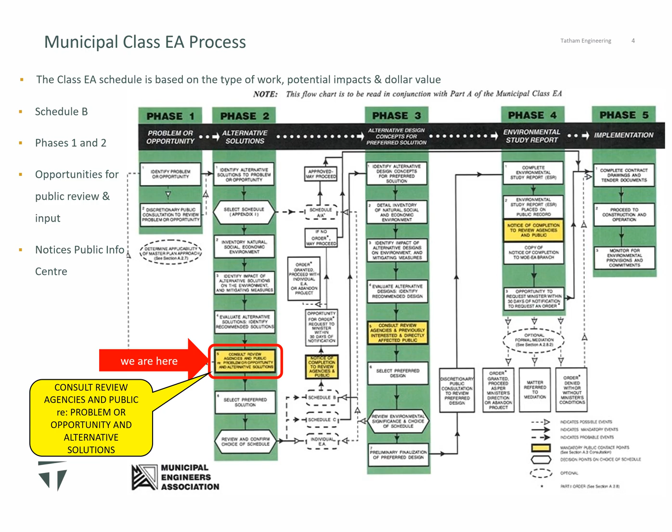Currently, the parking lot has 14 private deeded parking spaces that have been facilitated through historical development agreements for the water access properties on 1 Mile Island.

Beyond those 14 deeded spaces, there is limited parking for the general public and boat trailers. The existing docks will remain and are not part of this study.

The future needs for the parking lot area are to clearly identify the deeded parking spaces, provide additional parking for the general public, space for the trailers to park as to not impact vehicle movements, improve lighting, and implement stormwater drainage measures.

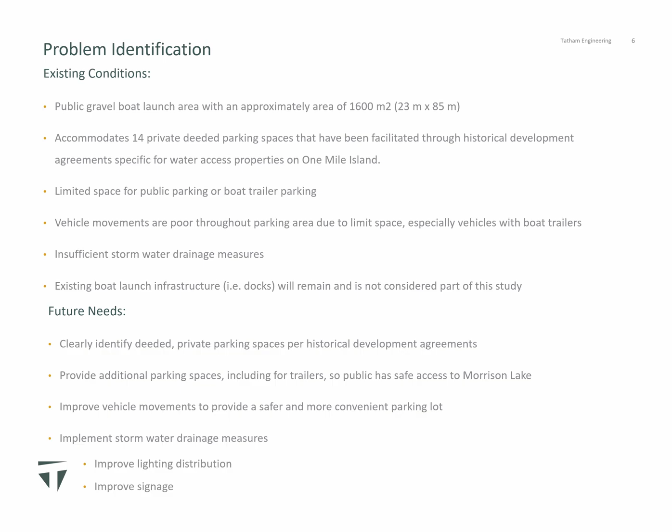A problem statement was developed to guide the municipal Class EA. The town's official plan acknowledges the importance of public water access and the enhancement and protection of these locations wherever possible. The problem statement speaks to accommodating all users and considers the environmental impacts of any expansion.

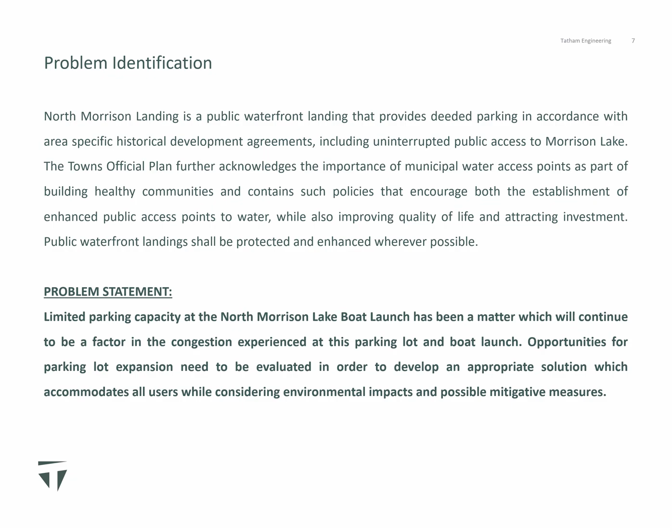4 alternative solutions were developed for the study. Alternative A is the do nothing, and the parking lot will remain the same.

Alternative B is the smallest increase in parking area and will provide 14 private spaces, 13 public spaces, and 4 trailer parking spaces. Alternative C is the medium increase in parking area and will allow for 14 private spaces, 25 public spaces, and 5 trailer parking spaces.

Alternative D is the largest increase in area and will provide 14 private spaces, 40 public spaces, and 10 trailer parking spaces. Alternative A does not address the future needs for the parking lot and therefore is not considered any further. Alternatives B, C, and D will be considered further.

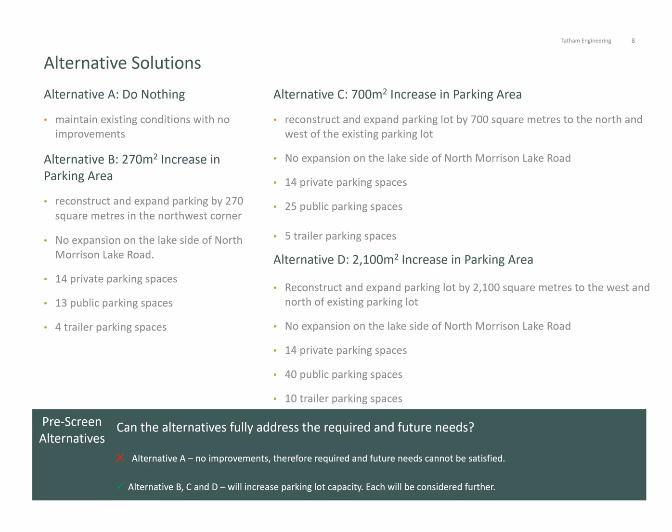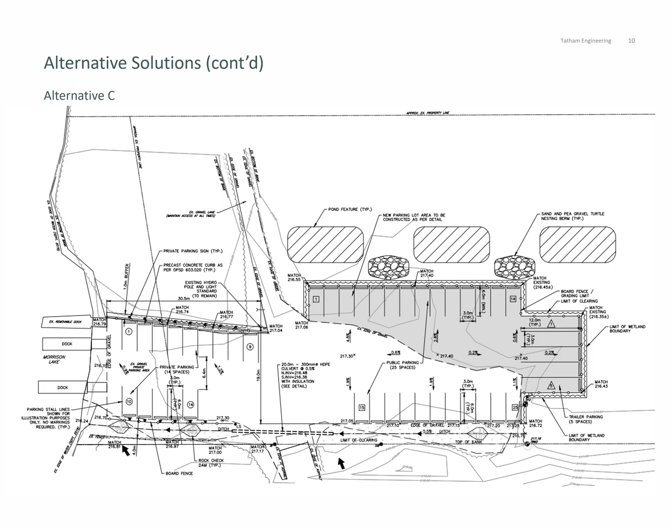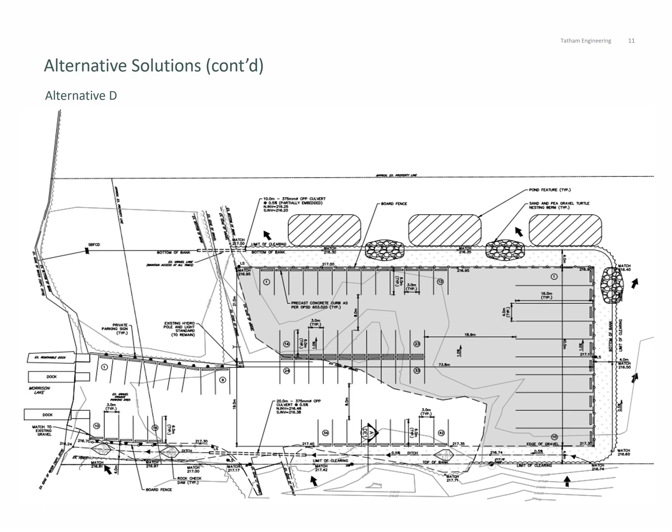The Stage 1 archaeological assessment was completed. No archaeological resources were encountered and the site was found to be clear of any archaeological concerns. A heritage impact assessment was also completed, and again, there was no concerns found.

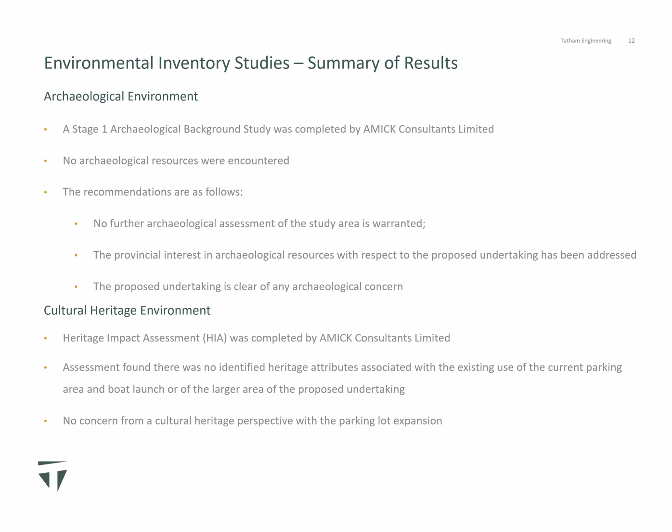A natural environment evaluation was completed as part of the study. The evaluation found that the expansion would be taking place in a provincially significant wetland complex. The study recommended that the parking lot expansion use ecological offsetting to mitigate the impacts to the adjacent wetland. All 3 alternatives have the offsetting measures shown in plan.

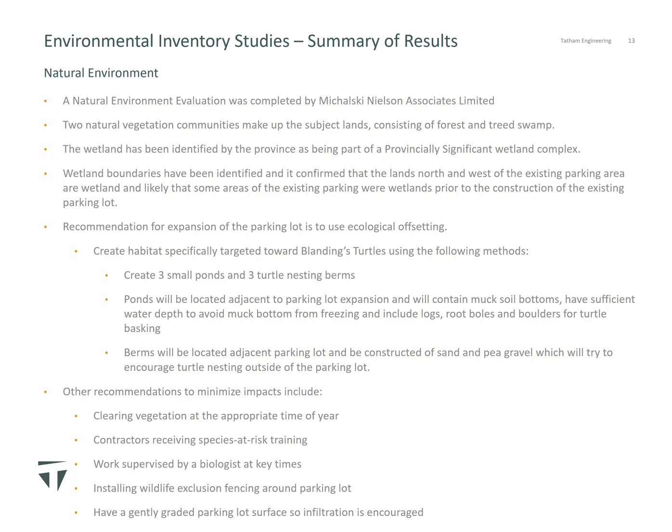The findings from the natural environment evaluation is that the impacts for Alternative B are limited, Alternative C are somewhat greater, and Alternative D is the greatest. This is to be expected given the increased footprint sizes of each alternative.

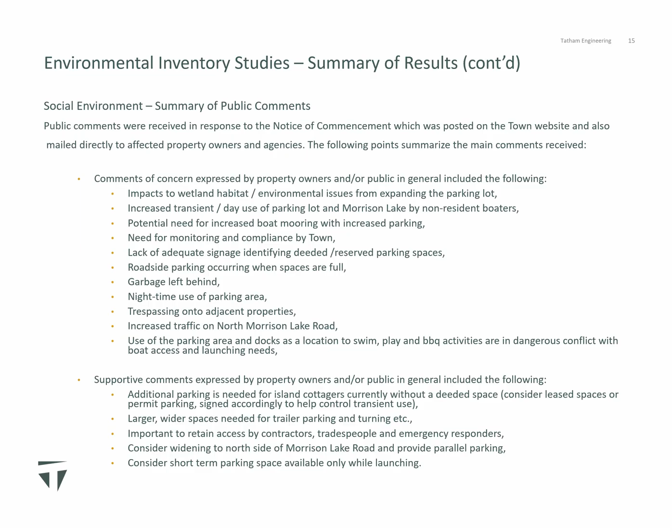Through the assessment of the alternatives, it was found that alternative C best balances the impacts and required needs of the boat launch and therefore has been selected as the recommended solution.

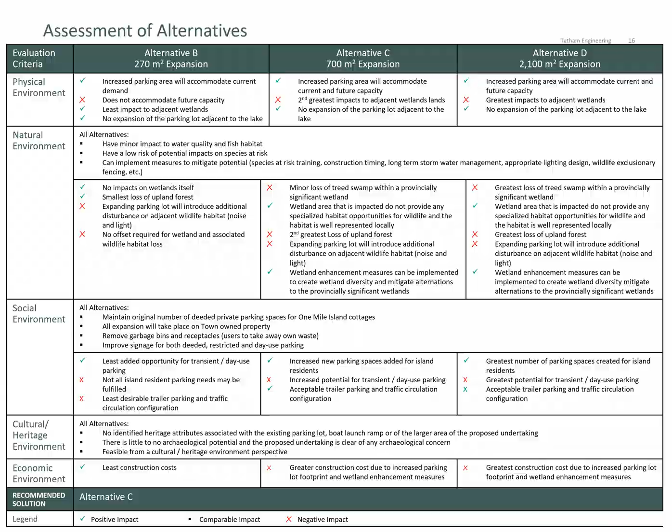A number of measures are proposed to help address current issues raised by the public comments. They are as follows. Garbage bins will be removed from the boat launch.

Consistent signage will be placed for each of the deeded parking spaces, indicating those spaces are reserved. There will be signage regarding boat launch code of conduct, and also the town will be reviewing an amendment to the parking bylaw to permit enforcement of the deeded spaces.

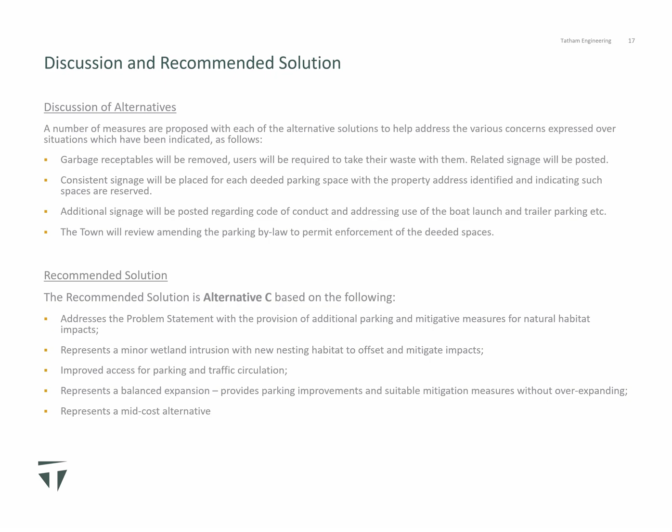It has been determined that the recommended solution is alternative C based on the following: it addresses the problem statement, represents a minor wetland intrusion, and provides habitat offset, improves traffic circulation and increases parking, balances parking lot improvements without overexpanding, and represents a mid-cost alternative.

Once the comment period closes, we will review and address all comments, which will inform the confirmation of the preferred solution. A notice of study completion will be prepared and posted to the project file for a 30-day review period. If concerns regarding the project cannot be resolved with the consultant or the owner, the ministry can be asked to make a Section 16 order.